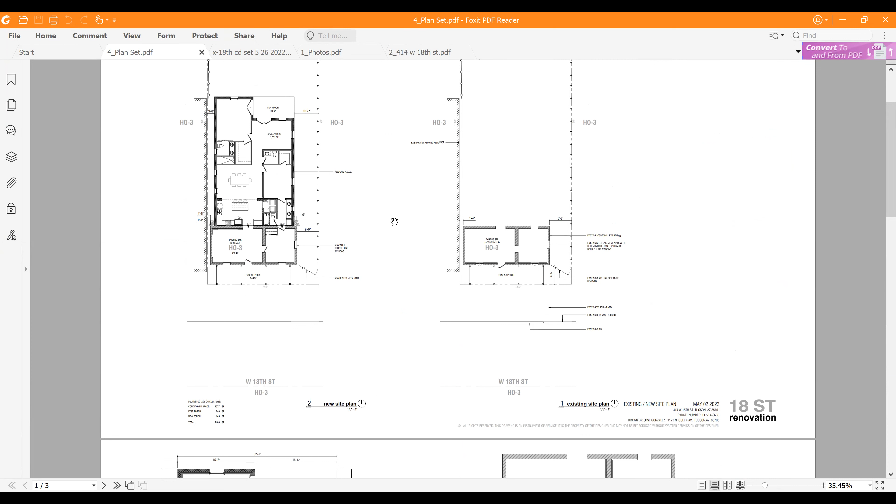We are proposing an addition, basically preserving that existing adobe structure while providing a similar layout to the previous dwelling. The previous dwelling had a similar layout to what we're proposing in terms of where you walk through the living room and proceed to the kitchen. However, before, all these spaces were a little bit more enclosed and not as open as in this floor plan.

In terms of our previous conversations in our historic board meetings, we are intending to preserve all the same opening proportions, as I mentioned, in the front facade. We're going to keep that 3040 opening and also introduce that opening in the new addition on both the west and east facades.

In terms of distinguishing the old and the new, the existing adobe structure is juxtaposed, as the new structure for the addition is inset on both the east and west side. As you can see in the floor plan, we are coming in about a foot on each side, just so we can have that relief showing what was old and what is new.

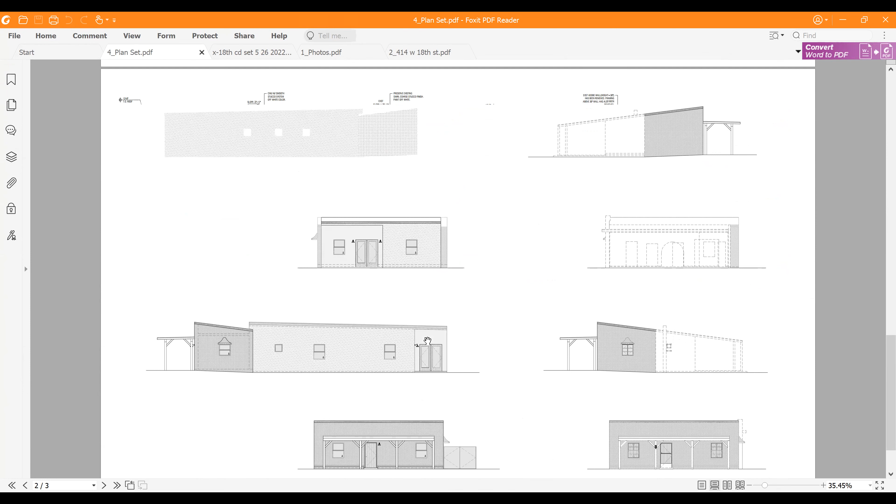In terms of the roof structure, the roof consists of a shed roof with a really minor slope of 1/4 of an inch per foot.

On this front facade, speaking about preserving stucco, we're intending to preserve this swirl stucco. The contractor will patch and repair as necessary and match the existing composition and texture as closely as possible. At the new addition, we are proposing to stucco over — if you can see on the plan, we intend to construct this out of CMU and then stucco over that CMU with sand floated stucco painted white. So all in all, the idea is to keep what is existing there and just keep the addition simple and appropriate to the existing adobe structure and all of its surrounding context.

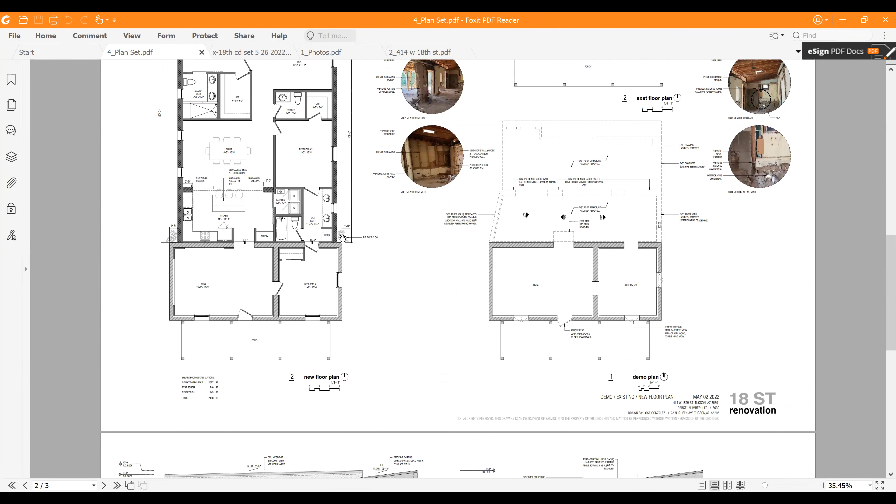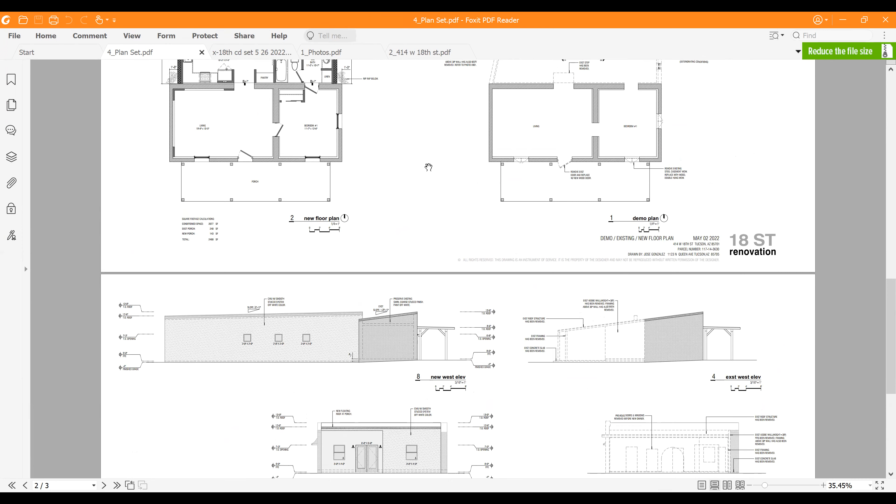So one of the conditions we had was right at this point where we meet the new and old structure, with the roof: how are we going to deal with water not ponding there? The idea is to have some sort of cant strip or cricket right at the middle, diverting that water towards the east and west. That cant strip could probably start at 2 inches going to nothing, which will be slightly minimal — I don't think it'll be visible from the street.

And that's basically all of it. Thank you. Could I ask you about the drainage? Yes, tell us about the drainage and how the water will be moved away from the structure.

Okay, so previously, if we look at these elevations on the right, the house had a continuous roof, so it was a continuous sheet flow of water. We're basically going to keep that same sheet flow design with the new addition. However, where it meets the old structure and the new, that's where we want to divert that water that's in the middle, divert it to the side, and it'll just sheet flow off of that existing structure.

And it will just all sheet flow towards the north. Are there any gutters or French drains or anything? No, it's just sheet flow.

And what's the foundation? You may have mentioned it, I'm sorry, I can't see the small type if it's marked or anything. The foundation? Yeah, so the new foundation will all be concrete. We might have a stem wall at the edge of the footers, and the new construction will be CMU.

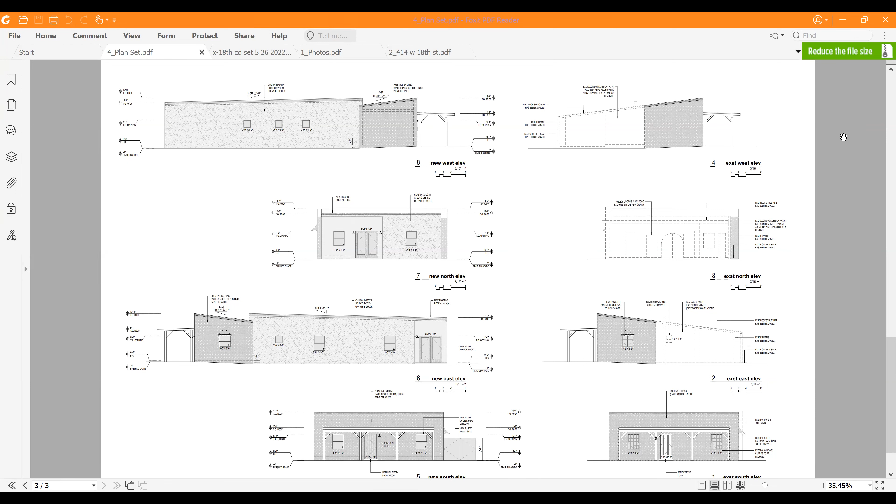I guess it could go either way. You're keeping them as they are now, speaking to the modifications, or you can go back to a wood window. There's no real documentation of what the original wood window would have been. The bulk of the wood windows used in Barrio tend to be double hung versus like a casement window. You don't know what the light pattern was, but they're keeping it pretty simple, the 1 over 1, so they're not doing any kind of divided light pattern. But I guess it could go either way. Barrio was, I would say, pushing for them to put the wood in versus the metal.

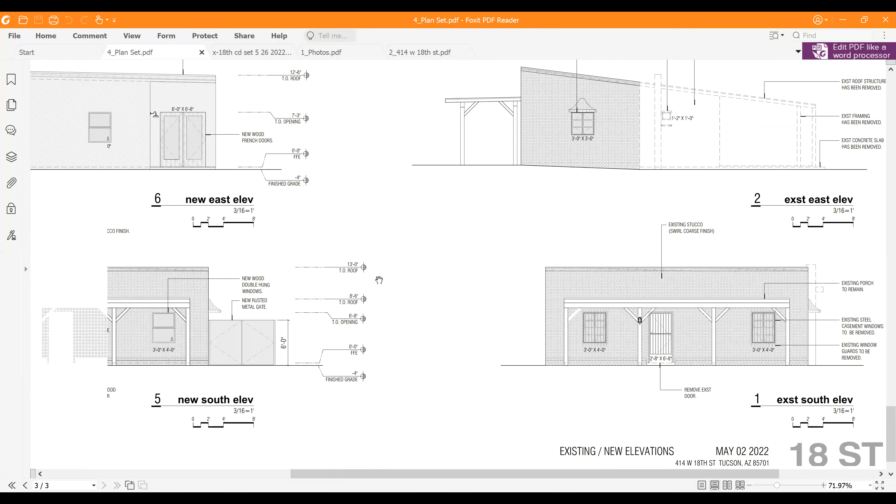Okay, and is that noted on the plans that they will be replaced with wood and all that? Yeah, it's actually, let me zoom in here a little bit. Sorry about that. So right here on the elevation, I have a note that says existing steel casement windows to be removed, and then on the other elevation, the new one proposed, I have new wood double hung windows, but I could call it out on the plan as well. I think that might be appropriate. I don't know what the rest of the commissioners think.

Okay, so those are my questions. Other commissioners, who wants to start?

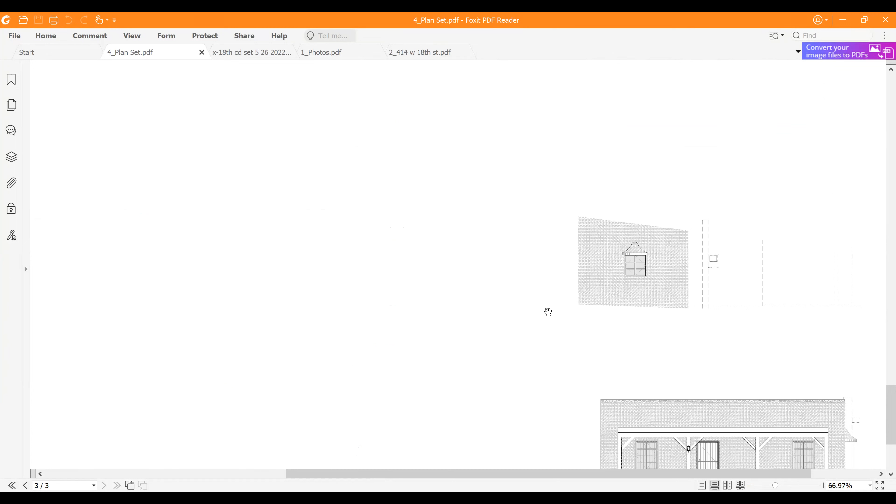In looking at this, has there been an engineer review this for the drainage issues? Because the way those roof lines are, it looks like there's really a potential for the water, especially since you're using two different types of materials, to drain down between those walls, and the adobe will be the structure that's impacted, where the two join there on the roof line. Yeah. And I'm not familiar with all the systems and how they work. Some of the architects on the commission would maybe have some more comment on that, but that's a little concerning.

And then as far as the windows, I think the wood would be fine. But I wondered about the new metal gate. Is that going to attach into the adobe, or is there going to be a freestanding post there? No, there's an existing freestanding post already there. Okay, great. That's perfect. Thank you. Okay, those were my only questions. Okay, thank you. Ricky?

Can you hear me okay? Oh, sorry, yes, I can hear you.

I don't have any questions other than what I'm sure Savannah's going to address with the architecture that Carol just brought up. I do have to go, though. Okay, so you're going to leave at 1:47. Okay, if you'll note that, Michael. Thank you.

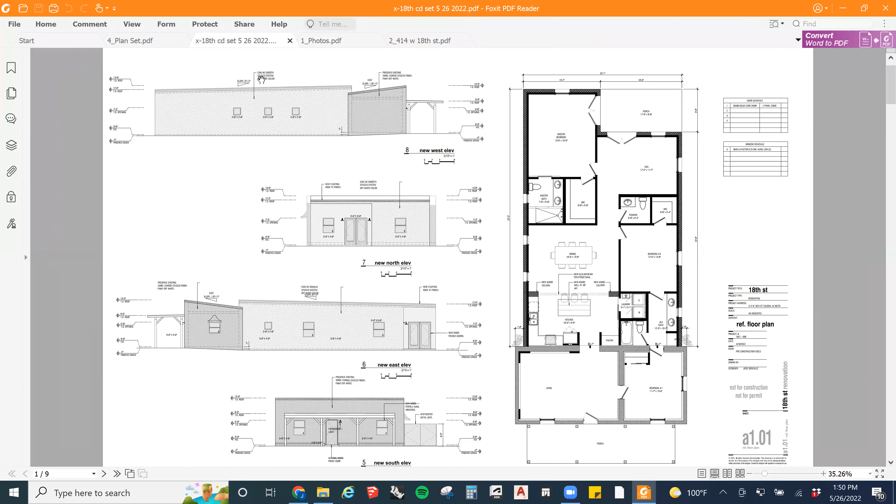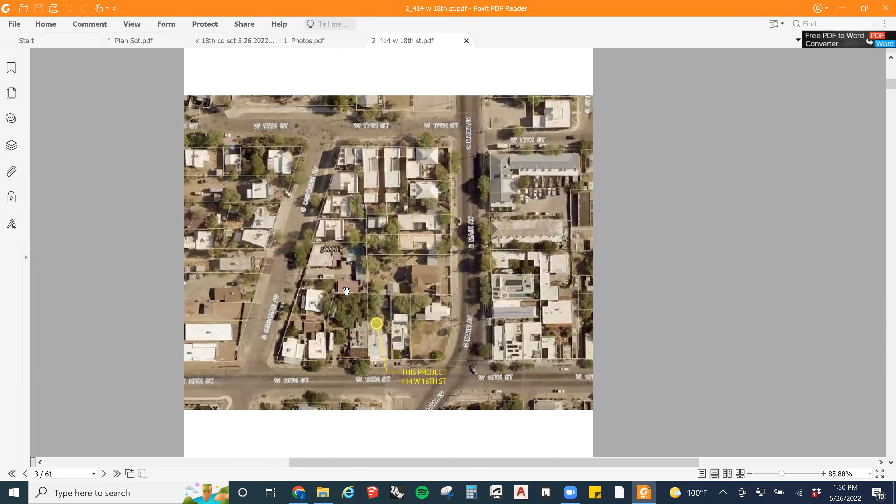Yes, I have a picture. Actually, no, it's not this one. I have to dig here for it, but we did provide the specs for the windows that we're gonna install there, for all the double hung windows and that new wood door.

Okay, if you don't have it, we have a couple options. I mean, Jody could look at it, or we could have a minor review, because we often do on doors. We've done that most recently a few weeks ago, ask for a minor review on the door if it changes, but we don't really know what the door looks like, the new one. What does everyone think? Yeah, minor review sounds fine. Yeah, sounds fine to me too.

I have a question too on that, I found the door that we're gonna use. Okay, yeah, let's see it. Let me just share my screen here real quick. Sorry, I'm trying to zoom in, my computer's acting a little bit slow. It's this one right here.

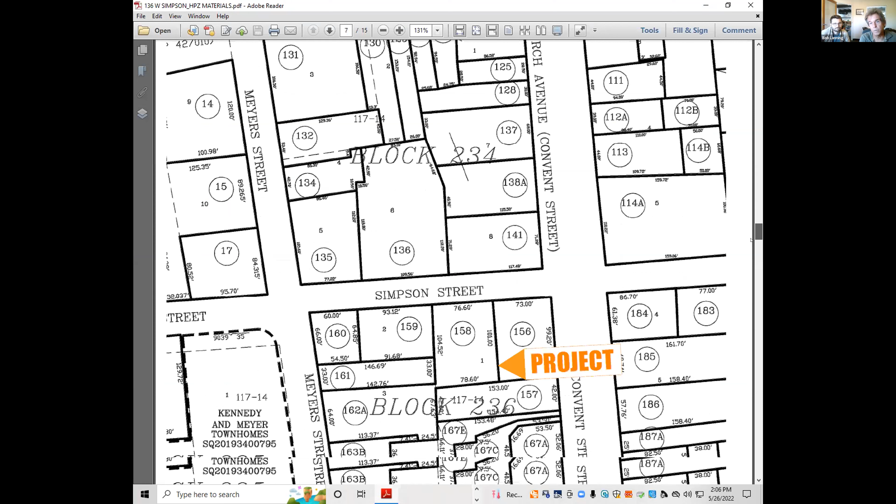It was built sometime between 1909 and 1919. Our clients would like to do a few things on the interior, but for purposes of this meeting, we're focusing on the exterior. Here's the project in terms of the assessor's map. It's just slightly west of Convent, between Convent and Meyer on the south side of the street on Simpson Street.

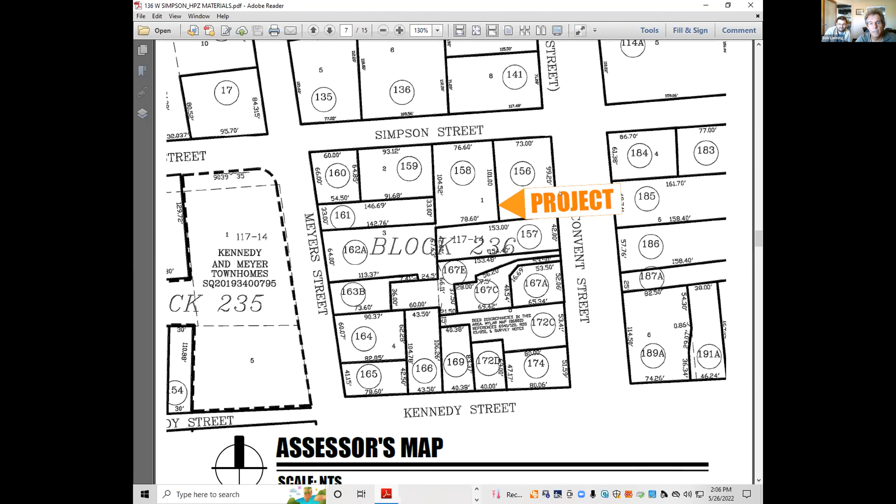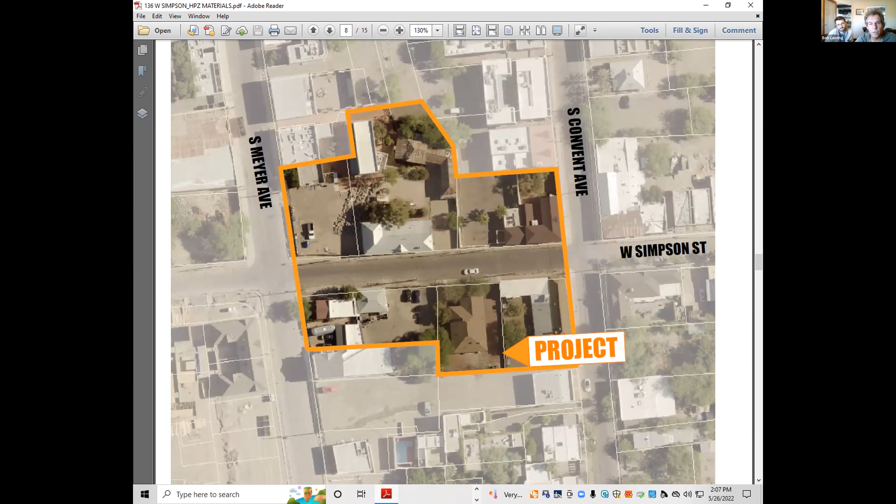Maybe you've already looked at all these. If you have, I can speed up if you want me to. Here's the aerial photograph of the development zone. So you can see that most of the structures in the development zone are contributing, and that shows up here.

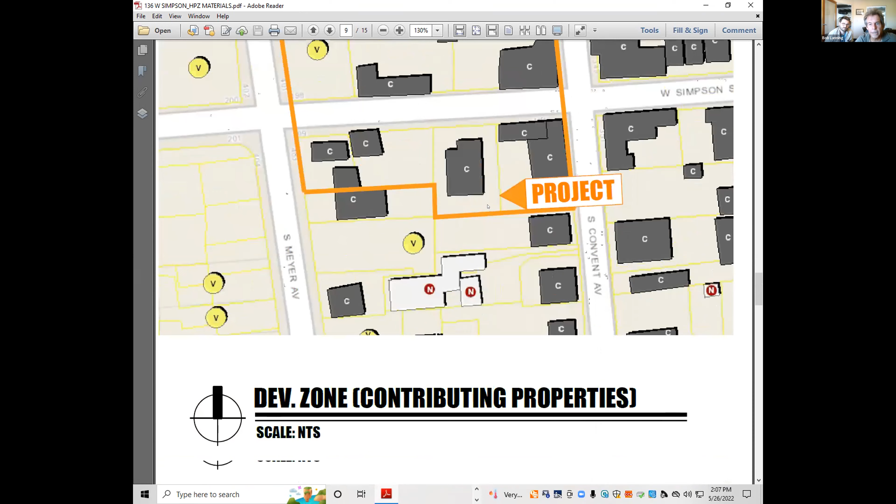And then here are contributing structures in the development zone. They mostly happen to be Sonoran row houses or transformed Sonoran row houses, with maybe one exception on the bottom right there. But nonetheless, what we have is a bungalow.

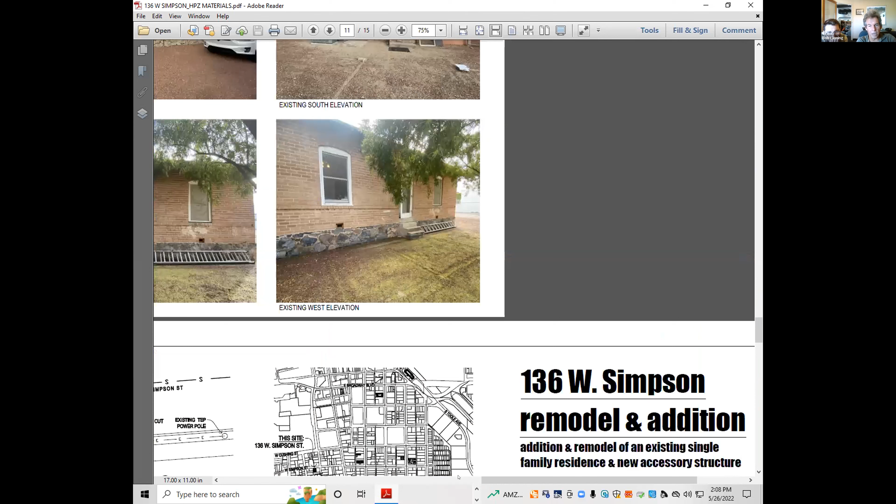The front of it is right here. Our clients came to us with, on the exterior, for purposes of discussion today, three major items that we'll talk about. One is a bathroom addition, the second is a porch at the rear, and the third is really not a major item, but there are several minor items we can also talk about, like site walls and a freestanding fireplace.

Here's the site plan. You can see the house, a classic bungalow, sitting in the middle of the parcel. It's got equal setbacks all the way around, which is kind of unusual, but it did give us an opportunity, we thought, to do a nice addition for a bathroom.

So the first thing is a bathroom, and that's on the west side of the building, a little bit more towards the rear than the front. That is literally a bathroom addition where we're centering the addition between a couple of existing windows. We are trying to make it so it feels like it is part of the original structure, mostly, but not 100%.

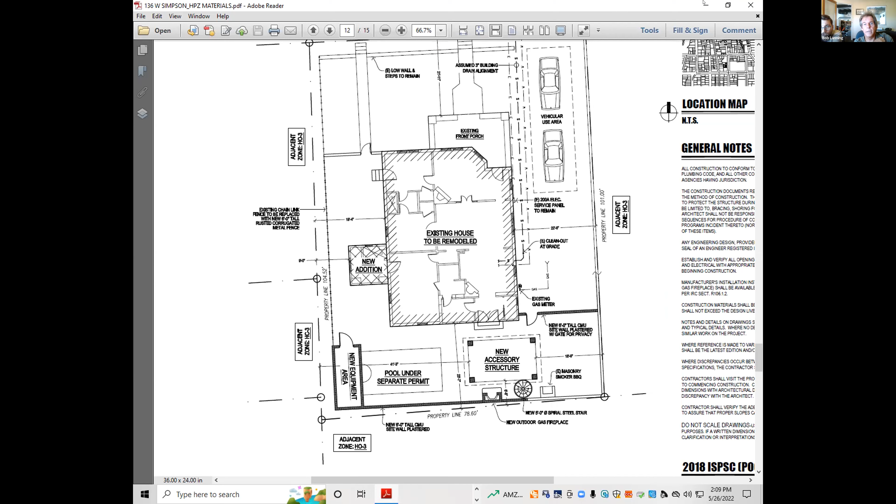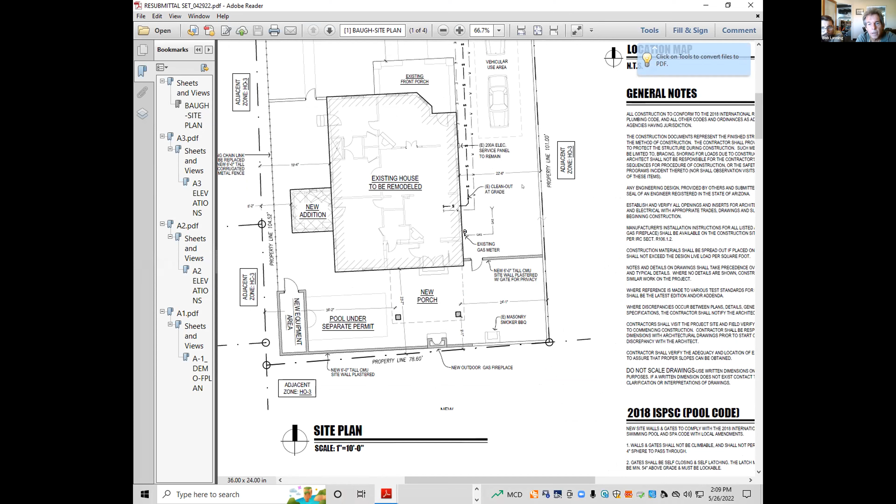Let's go to the other drawings right there. These are our revised drawings. The second part of our project is at the rear, towards the bottom of this drawing, which is a new porch. We'll look at those elevations as well in a second. We've got the third items we'll talk about later. So here's the floor plan.

Let's just go to the elevations. So here's the front elevation at the top right, the existing one, and here's the front elevation just below that. The only difference is the addition off to the west of the bathroom. We decided to have the bathroom be constructed out of concrete block, plastered. That will differentiate it from the exposed red brick, which is elsewhere in the original residence. But that's part of what we have.

One of our challenges always is how much to make it feel compatible and how much to differentiate it from the existing original structure, so as not to create a false sense of history. So what we've done is create a plastered addition, but we've decided to have the roof just be extruded, a hip roof extension over this plastered rectangular bathroom addition.

There are 2 windows in it. They would both be wood hung windows, a small one facing north. You won't really see that too much from the street because it's well situated back, and there's also significant vegetation there, plus a kind of curved front wall that will block the view of it.

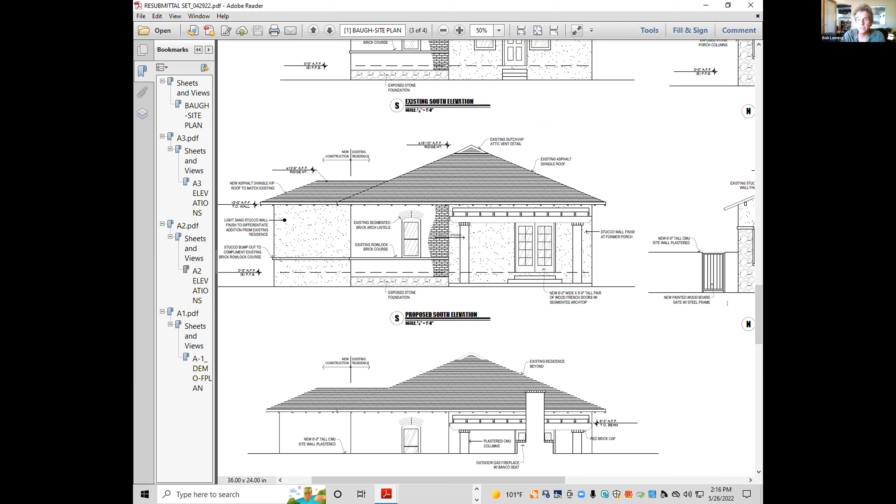So that's on the rear of the building, correct? Yeah, that's at the rear of the parcel, that's right. And so the Barrio had nothing to say about those French doors? No, they did not.

So ready for us to ask other questions? I'm trying to think if there's anything else I can suggest that I haven't thought of, but I guess I am ready. That's fairly quick, as best as I can make it. Okay, who would like to start?

My question had to do with the removal of the back door and the two windows to put in the French door. Do you have any documentation that that was an addition made later, and when? Or do you think that was part of the original house at one point? I mean obviously it was at one point, but early on?

Well, the only reason I think it was a porch, I don't know when it was enclosed, but I do think it was a porch because the brick walls, you can kind of see in this plan, turn inward and carve out a rectangle in the southeast corner of the structure, and everything outside of that is framed. Just from my years of experience, my gut says that was a porch that at some point was filled in. It's the only plastered frame walls on the exterior of the building. As far as the date, I just don't know. I suppose there's a chance when we open up these walls we could discover things that would tell the date of it, but I just don't know. I've been on projects where newspaper was stuffed in there with 1960-something or 70-something on it, but I just don't know.

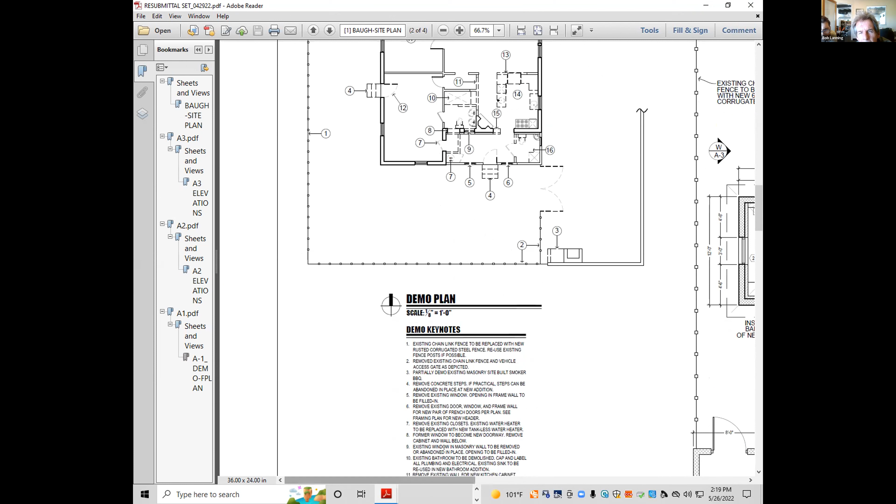Yeah, hold on one second, sorry. Is that by chance an original window there? I think that it is. Do you remember? Yeah, I think it is. Well, existing window in masonry wall to be removed or abandoned in place.

Yeah, because it goes into that bathroom right there. But we're leaning towards abandoning in place so that it could, in theory, in the future be uncovered and reused, I guess. Yeah, I guess it clues me into thinking, I think you're right, that was an exterior wall, right? I mean, all the evidence seems to be there.

Yeah, so to pop in on this, I was looking up the Sanborn maps in 49, which is what I have online to the latest. It still shows up as a porch area, so it was enclosed sometime after 49.

Thank you, Jody, and also Savannah. That does provide some evidence that that was closed in later. It was a porch, and it would have not been enclosed within the period of significance, correct? If it was 47, for the barrio. Are you asking us?

Jody, I'm asking Jody, she'll know more quickly. Don't be too sure, I'm trying to think. Their period of significance is kind of early. I'm guessing it probably was enclosed outside of their period of significance. I keep getting confused with Armory Park on their period of significance. You'll have to give me a minute to look it up.

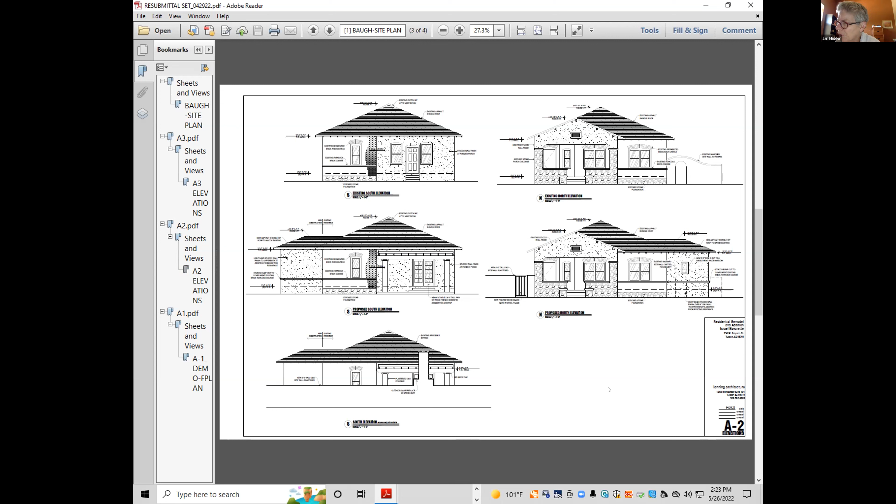There's kind of a smaller existing, I guess they're calling it a barbecue on the plans, but there's something similar in the wall, I think, a little further east right now. But I only had a couple questions.

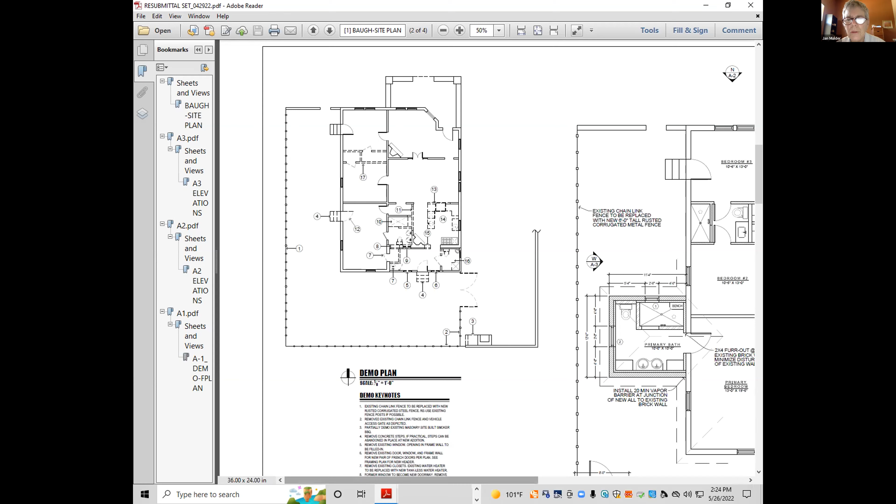I think one has to do with the bathroom addition and your comments about preserving the existing brick. And so what it looks like you're doing is you're essentially using that existing door for access. Is that right? Yes, that's right. As a passage, so to minimize that, okay.

And then just a point of clarification, at least the plans we were reviewing had the detached shade structure and the spiral staircase, and so I think there's some extra plans floating around in the set that we looked at. So it needs to be clarified as part of the submittal.

The ones in the HPZ materials are old, but there was another attachment with revised plans, and I think those are the right ones. I don't think the old ones should be part of their plan set. They were originally reviewed by Barrio Historico with their full packet, and then Barrio asked them to revise, which is why their revised plans are the revised plans. Typically when submitting, they don't include all the paperwork with pictures and text, just the plans. So the old plans we saw are not part of the package. I was just trying to clarify that, so thank you.

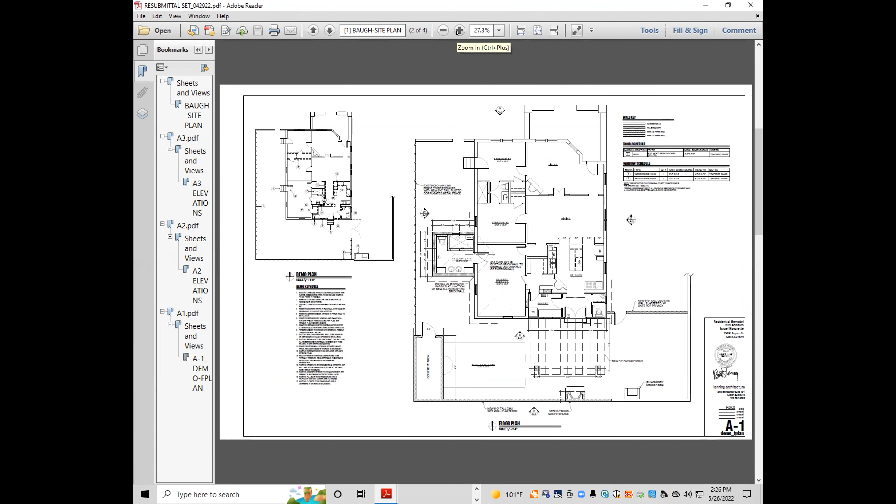I just had a question about the door into the bathroom. You're replacing the door, but what happened? I noticed there's like a little arch transom. Can that remain? What happens to that? Well, in an effort to preserve the brick, we're building a fur out that will ultimately protect all that brickwork, including that segmented arch above the doorway. So you're not going to see that; the addition will essentially be covering it up.

But you'd see it from the bedroom, right? On the inside of the bedroom? Yeah, I think the walls are plastered, so the brickwork isn't really exposed on the inside. Even now you don't really get to see that.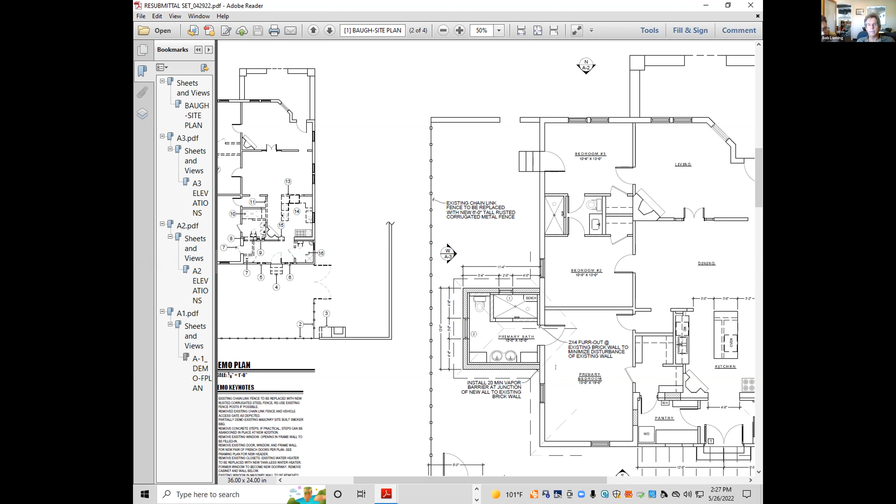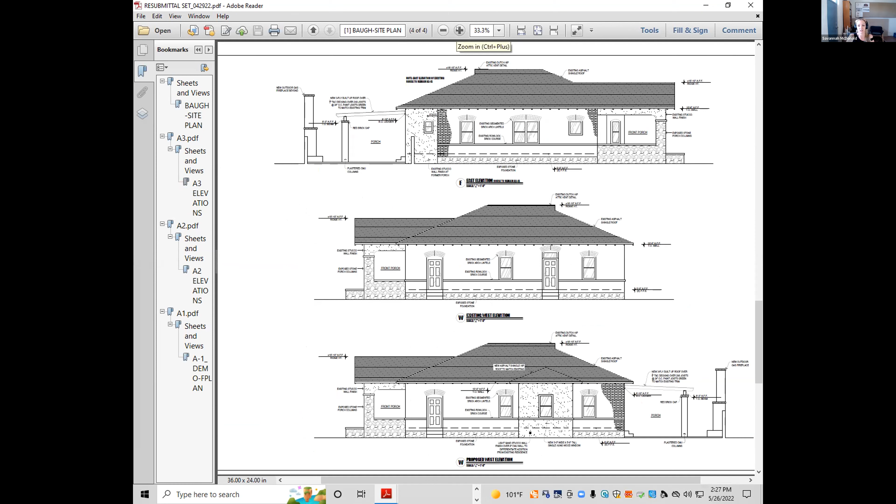The transom though, can you see that? Oh, the transom? I guess that would stay, right, Bob? I guess it does, yeah. We haven't got that far. But it is on the inside there, we'll have to figure that out. That's good. I appreciate the effort to keep the brick intact and a sensitive addition, so no issues. Actually, I think our ceiling height will be plenty high to keep that transom. Yeah, we'll keep that.

Good. Okay, so who will do a motion? I will. In the matter of 22-016, 136 West Simpson Street, I move that we approve as presented. Is there a second? I'll second, Jan. Is there further discussion? If not, I'll call roll. I vote aye on the motion. Carol? Aye. Jan? Aye. Savannah? Aye. The motion carries 4-0.

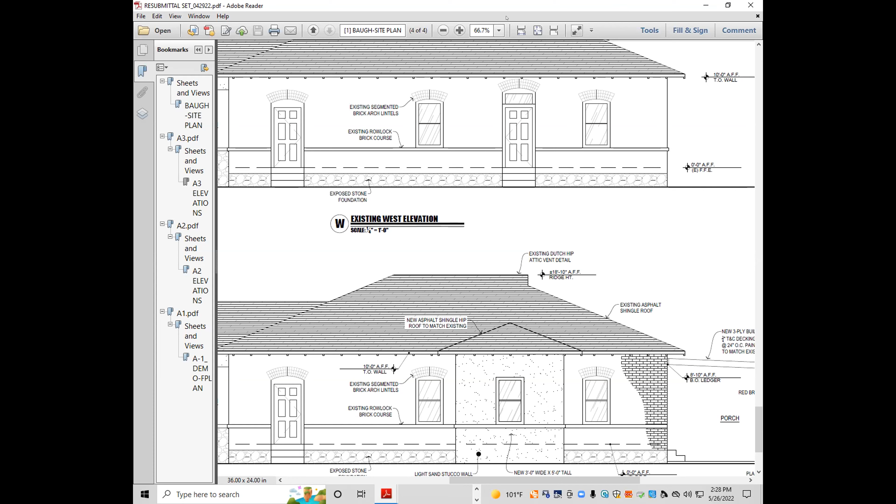And so I'm sure that Bob, you and your colleague know the drill from here on. Yes, it's Stephen Curti, by the way, I'm sorry I did not introduce him. I'm sorry, what's your name? Stephen Curti, at your service. How do you spell your name? C-U-R-T-I. And how do you spell Stephen? With a P-H. Thank you, because we'd want to say that you were presenters. Okay, thank you very much.

Thank you. So Jody and Michael, do you want to stay on after we lose our quorum so we can discuss what we're going to do? Will do. So Bob, is your case the next one? Bob Vint? I'm here with my assistant Christian Sanchez. No, Bob, but we can't do it because we're going to lose a quorum. That's what I figured. Yeah, I'm very sorry about that. I'm sorry too, I had to reschedule something. It's okay. So Jody or Michael will get back to you as soon as they're able to reschedule, but it won't be that long.

All right, thanks, but nice to see all you guys. Take care. So should we just end the meeting now, Jody and Michael, since Carol has got to leave? Carol, are you leaving now? Yes, Carol's leaving now. So if she's gone, then you might as well adjourn the meeting. Meeting adjourned at 2:30. Then you can stop the recording and maybe we can just stay on and talk about what we're going to do, but we can't have a quorum.